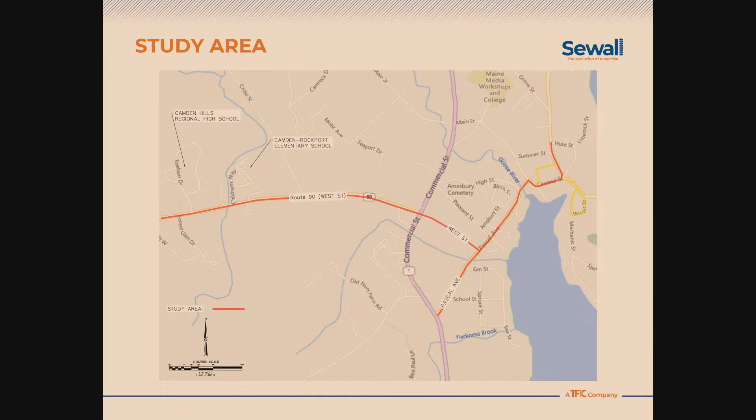I'll let Eamon talk about the website results. We've had two avenues for gathering your feedback so far: a meeting like this last May, followed right away by an online survey. We had 54 total responses to the online survey, which was open from May until earlier this year in January. So to recap, we've had one public meeting so far and an online survey open for the second half of last year.

The survey had just a few questions. The first asked about your needs, an open-ended question where you could write your own response. This takes all 54 responses and aggregates them — where there were very similar comments, they're combined, and where totally unique, they're left alone. So you see the most common response on the left and the least common to the right. We'll go into the top 5.

You can see there's a real set of front runners here. But if we sort them by theme, blue represents non-motorized travel, so comments about pedestrian and bike connectivity. Green had to do with vehicular travel, like lane widths and parking.

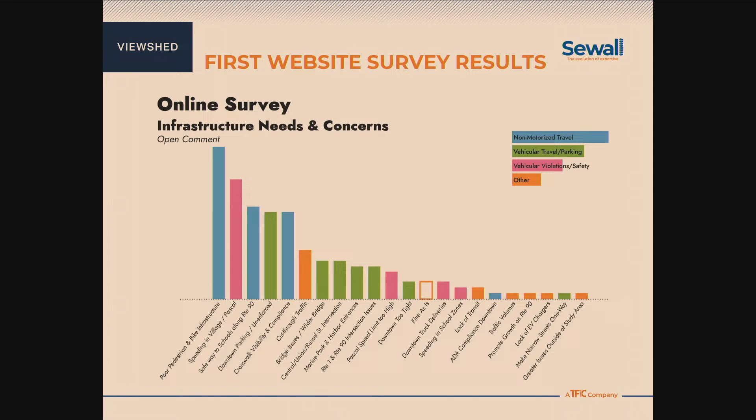Pink had to do with safety or concerns around safety, and orange were other comments. So if we go to the next one, these are the top 5.

Leading the pack was the concern that there are not enough bike lanes or safe places to walk. The second was issues around speeding, followed by no safe way to walk or bike to and from the school. Fourth place was inadequate crosswalks, followed by parking in the downtown area. So these are the top 5 concerns or needs expressed by folks responding to the online survey.

Just a little color here to see some of the specific comments. Related to not enough places to bike or walk, there was a comment that said, we really need a multi-use path, it's desperately needed to and from the school. Another comment noted that vehicles are often traveling too fast in the village core, that there need to be sidewalks along Route 90, that there are no sidewalks or crosswalks to get across Route 1, and not enough parking here at the library or at the Opera House.

Then the second half of the survey asked specific questions about particular areas in town. On the left, the village area. In the center, we have Pascal Ave. And on the right, we're showing the key map of West Street and Route 90 from the school all the way down to Pascal. At the bottom, you were given a set of choices: what's the most important issue in this area?

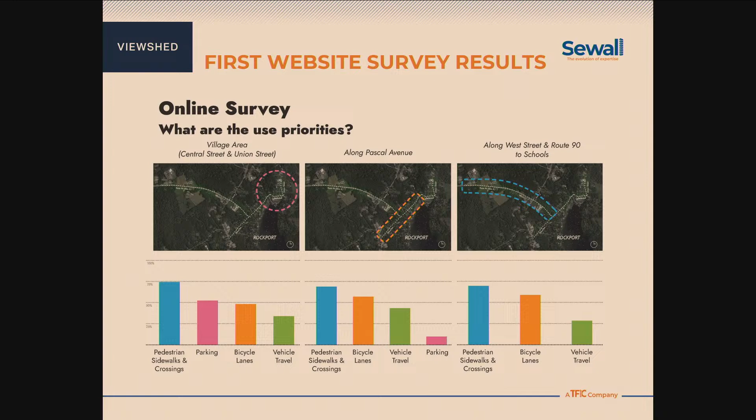All right, take it away, Diane. Back to me. So we did do a lot of traffic data collection and survey information, and I just wanted to touch briefly on those because it does impact how we got to our recommendations.

In terms of safety, there were no high crash locations within this study area, and there were also no locations approaching that high crash threshold. So we had no real accident crash location issues.

We did do capacity analysis of key intersections. Those key intersections where we did AM and PM counts under peak summer conditions included the signalized intersection of Route 1 and West Street and Route 90. We also looked at the unsignalized intersections of Route 1 and Pascal, Pascal and West, Pascal and Main, and Central, Russell, and Union.

What we found when we did capacity analysis for both 2023 existing conditions and 2045 projected conditions was that there was only one capacity constraint identified, and that was the intersection of Route 1 and Pascal, where during the PM peak hour, not the AM, movements exiting Pascal currently operate at level of service F with long delays. Under 2045 conditions, those delays will become really extensive.

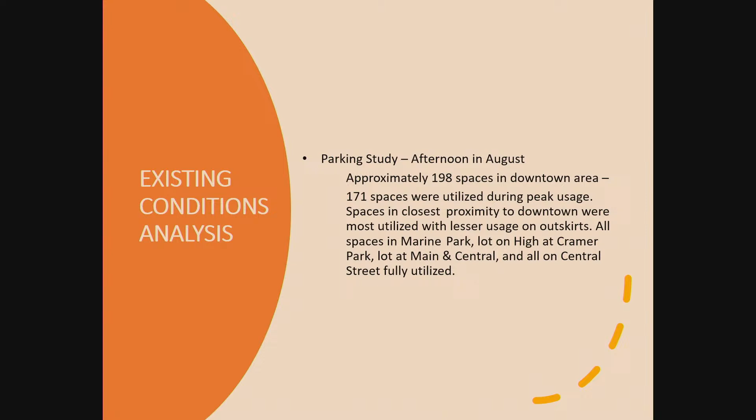All of the spaces in Marine Park were full. The lot on High Street at Cramer Park, the lot at Main and Central, and all of the spaces on Central Street were fully utilized at the time of this study. So that does show there is some more demand for parking. The spaces that were vacant were out on Lime Rock Street or back on Pascal. They weren't very close to downtown at all.

So based upon all of this, we've made some recommendations for what these roadway sections should look like in the future, with the idea of traffic calming on some of these facilities. The first one is Route 90, and again, this is to provide for students going to and from school. Most of Route 90 has a fairly wide right-of-way.

So what we're recommending is first that it be restriped with 11-foot lanes instead of 12-foot lanes, which might help slow travel speeds a little bit. Right now it's 12-foot travel lanes, which is wider than it needs to be. Then a 10-foot multi-use trail would be constructed along the side with an esplanade separating it from Route 90, providing for both bicycles and pedestrians to get to and from the schools.

Just so everyone's clear, the bottom panel represents the depiction of existing conditions. What we're suggesting would be on the top portion. That's consistent with all the forthcoming slides as well.

The next one is Route 90. When we get near Route 1, at this point we have less right-of-way, so we may need to get that path down to 8 feet, which is basically a bare minimum. We're going to try to get it to be 10 feet, but the right-of-way in that short stretch between Route 1 and the 4 homes that are there is a little bit narrower, so we may not be able to get a full 10 feet, and at that location it would be curbside. There isn't room for an esplanade. So that short stretch near Route 1, this trail would be curbside instead of separated by an esplanade.

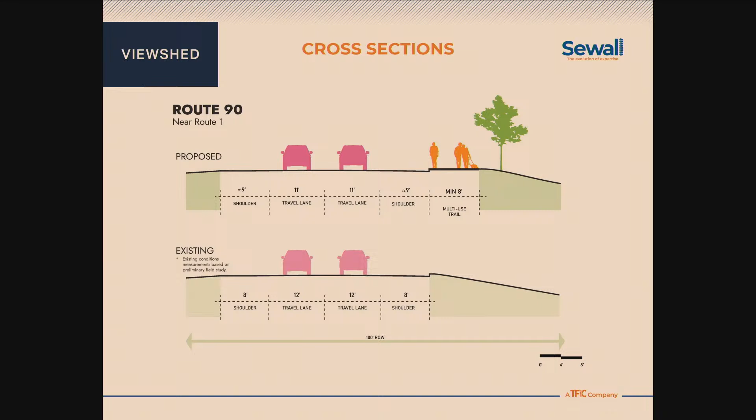Pascal Avenue, the section that goes from Route 1 to West Street, currently is already 30 feet wide—29 to 30 feet the entire length. There's a 5-foot existing sidewalk that generally is in pretty good condition. So this allows us to restripe that portion of Pascal to provide two narrower 10-foot travel lanes, which is fairly narrow, and that should slow your traffic speeds.

And then we would restripe the shoulders for bike lanes and provide bike lane markings so that the driver sees the bike lane markings and also will slow, recognizing that there may be bikes out there. So that's a very low-cost improvement that can be done with very little money, except for restriping and bike lane markings, to create that section along Pascal.

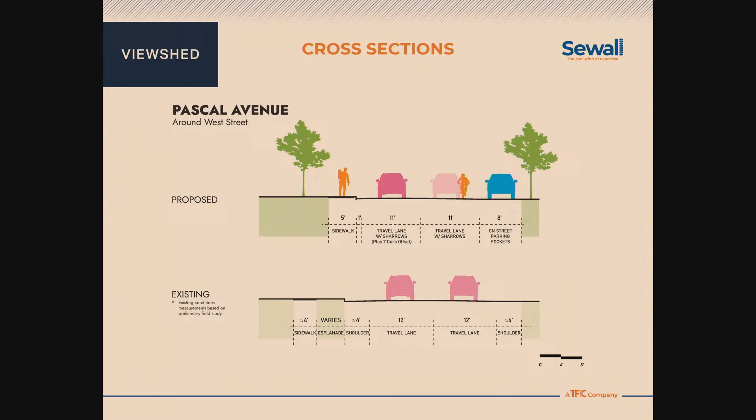When we get around West Street, there's quite a bit of on-street parking occurring, and you have a bit of a village area there, with some apartments that use on-street parking as well as a shop. So we would recommend here that we use the right-of-way to create some 8-foot parking pockets, some formal parking pockets. I would recommend the travel lane get a little bit wider to 11 feet because we'll have car doors—10 feet is quite narrow, and you don't want car doors opening into bicycles or whatever.

So this section would be marked with sharrows. Instead of bike lane markings here, you would have sharrows, which is a marking used in the travel lane to show that you should expect bicycles, and that bicycles have the full right to use that lane as much as you do. This is the same thing we're recommending downtown, because you don't have the width to add bike lanes, so this section would be marked with sharrows.

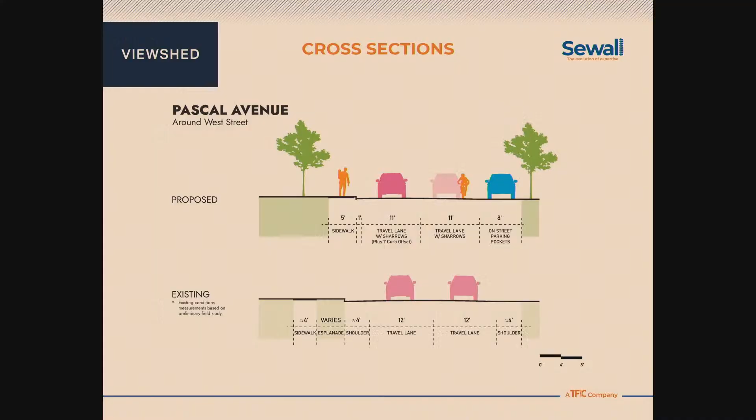When we get to the downtown section, from Bridge to Main Street, the committee felt strongly from the very start that there should be sidewalks on both sides, and we've been meeting with MDOT to convey that it's important that the new bridge have sidewalks on both sides. This section proposes pretty much what you have now, a pretty wide travel lane because of the curve, with the high elevated sidewalk on one side needing some offset, but we add a 5-foot sidewalk on the hotel side where there is none now to connect towards Marine Park.

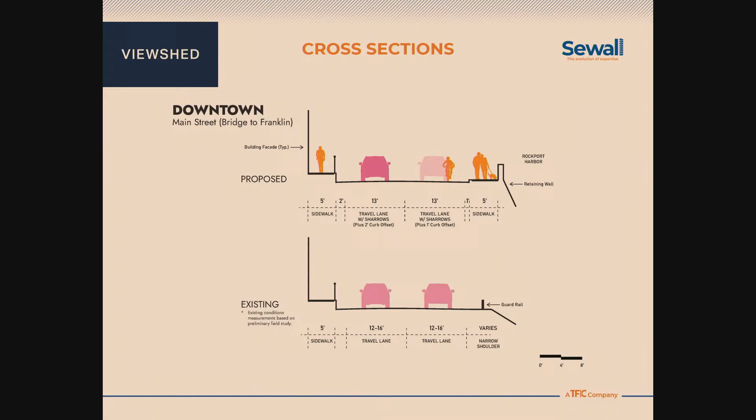That will require a retaining wall because there's a steep slope there. If we look at the downtown section, again, this is very constrained. Right now you have 8-foot parking lanes on both sides, 11-foot travel lanes, which we're recommending no change to.

But we are recommending a sidewalk on the opposite side from the hotel. This will also require a retaining wall because there's a steep slope, a couple of telephone poles, and a tight right-of-way there. Currently, people who park on that side have no place for their passengers to get out. There is no place to safely cross. They're dumped in the middle of the road instead of at a crosswalk. So we feel it's really important for a downtown to have sidewalks on both sides.

So that is proposed to be added there, and the rest stays pretty much the same. But there is a short section by the park where there's a 5-foot sidewalk, and this would be extended up towards the Opera House to that first driveway. We'll show all this on plans in a minute.

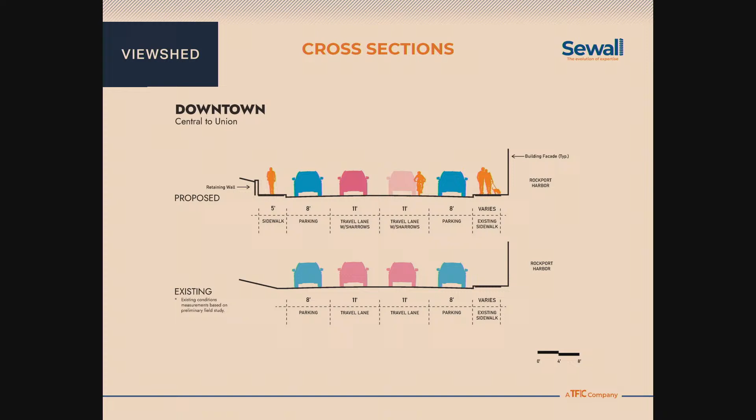The next one is West Street. Originally we had proposed 10-foot travel lanes to keep speeds slow on this residential street, along with bike lanes and the existing 4-foot sidewalk, but the committee felt that since we have a 10-foot multi-use trail up by the school, we should just provide a 10-foot multi-use trail along West Street as well, so that both bikes and pedestrians can use it. So here, again, we're proposing 10-foot narrow travel lanes to keep speeds low, with a 10-foot multi-use trail.

Then when we get to the RES site, it's pretty much the same section, except we're proposing some on-street parking there. We have more right-of-way at the RES site, and the multi-use trail might actually meander in and around the park a bit. It may not be exactly curbside, but there's some room there to add extra on-street parking for the RES site.

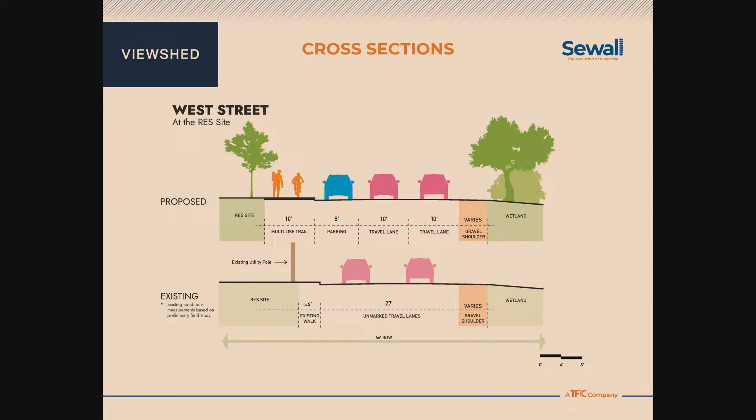That's it. So I'll continue on where Diane left off. This is a plan view representation, an aerial view that basically shows the perspective of the cross sections we were just reviewing.

So this is Route 90. It's cut off a little bit on the left, but it does anticipate the multi-use path extending to Keelson, the school drive. The green stripe represents the grass esplanade between the highway and the 10-foot multi-use path. It shows the slight narrowing of the striping on Route 90 from the current 12-foot lanes to 11-foot lanes, and the adjustment of the paint stripe shoulder width from 8 feet to 9 feet, with the attempt of narrowing lanes to try to slow traffic down.

On the right side of the slide, there are a couple alternate paths. One shows a completely alternate path to the elementary school. That's just something to consider to provide additional connectivity to that school.

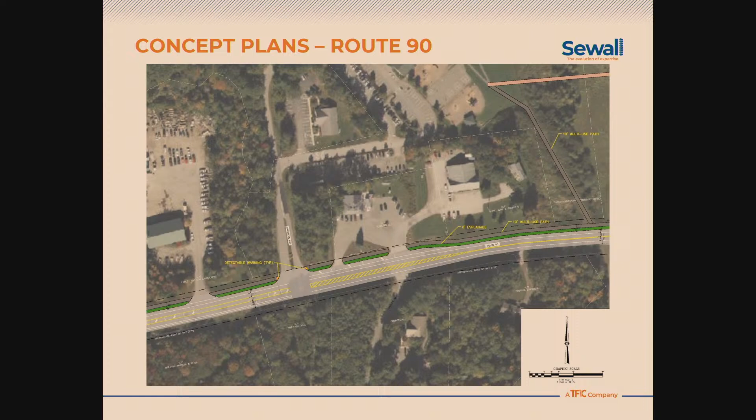Then continuation of the multi-use path, primarily with an esplanade. There is a bit of right-of-way constraint close to the intersection of Cross Street, where we'd likely have the multi-use path with just a curb section, no esplanade there, due to right-of-way constraints. That house is very close to the road with some fairly large trees right there.

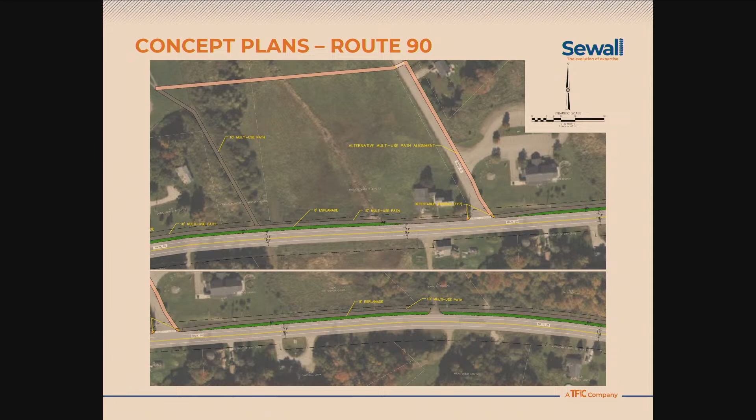So an alternate to that multi-use path alignment could be a path that goes down Cross Street and crosses over that existing field to the elementary school. Obviously, that's private property, so it would have to be an easement or a taking or something like that. But we just felt it was a good option to show, provided that the landowner was amenable to it.

This is the section near the intersection of Route 1, where the right-of-way becomes fairly constrained, particularly on the north side of Route 90. This section has a multi-use path labeled 8 to 10 feet. 8 feet would be the bare minimum you'd ever want for a multi-use path, preferably 10, but that section would be directly on a curb, so there'd be no esplanade as you approach that intersection.

At the intersection itself, there's an existing crosswalk that crosses Route 1 from the res site. What we'd propose is another crosswalk heading north to the other side of Route 90 to provide connectivity to that multi-use path, with an ADA accessible ramp and detectable warnings on that side of the intersection.

Another thing we talked about at that intersection is providing exclusive pedestrian phasing, because Route 1 is very difficult to cross. We'd propose to DOT that this become an exclusive pedestrian phase, so when a pedestrian pushes the button to cross Route 1, all traffic stops rather than moving concurrently with pedestrians on the same side. That's what we'd recommend for that intersection.

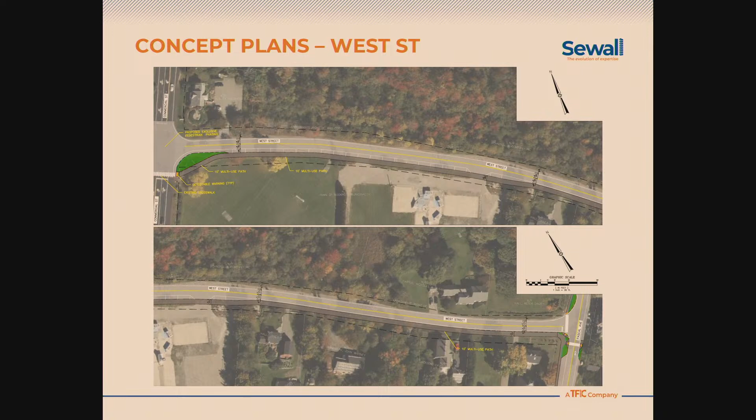The top pane depicts the intersection of Route 1 and Pascal, effectively the same footprint you've already got - it's effectively a restriping project. So you'd have 10-foot lanes, narrowing the travel lanes. 10 feet is fairly narrow; in fact, DOT wouldn't let you go any narrower than that. That would be the bare minimum, which should calm traffic down to a certain extent.

It's a little hard to see, but if you look at the little white symbols in the shoulder, that would be the formal bikeway, the bike travel lane, about 4.5 to 5 feet in width. Again, within the limits of existing pavement, so it'll vary a bit, but you have the pavement width to accommodate this cross section all the way up to West Street, which is great.

There's a crosswalk proposed at School Street. There's not one there now, and it's approximately 400 feet from the one at Route 1, so we'd propose a crosswalk there. All of these crosswalks on Pascal, we're recommending be equipped with rectangular rapid flash beacons, so pedestrians push the button and get that visibility.

Can you go back really quick? Where's that? You're getting a sneak preview of the rest of the slides.

Those pedestrian big flashing signs let pedestrians push a button to make it really clear that somebody's crossing that crosswalk. They really increase visibility and reduce accidents at crosswalks. They're solar powered and pretty inexpensive - about $15,000 for installation, but DOT's had a program lately where they get them at bulk cost and sell them to towns for their cost, which reduces it even further.

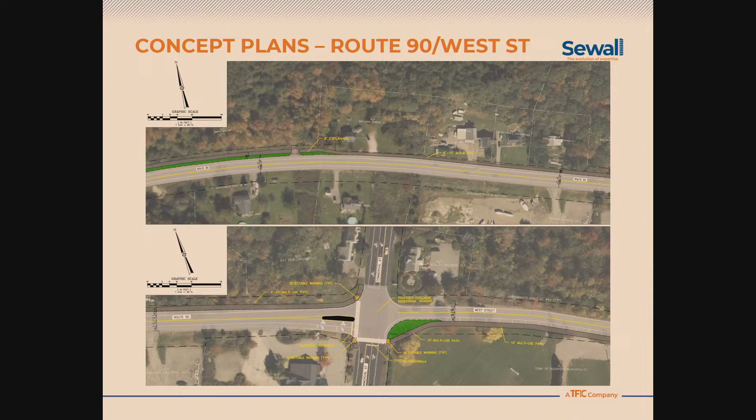We're not proposing any changes to the lanes, although I have looked at that. So the existing lane use is southbound on Route 1 — so if I'm going southbound and going to turn right onto Route 90, there's a median strip, you can see that black tongue there. Most trucks go over that median strip.

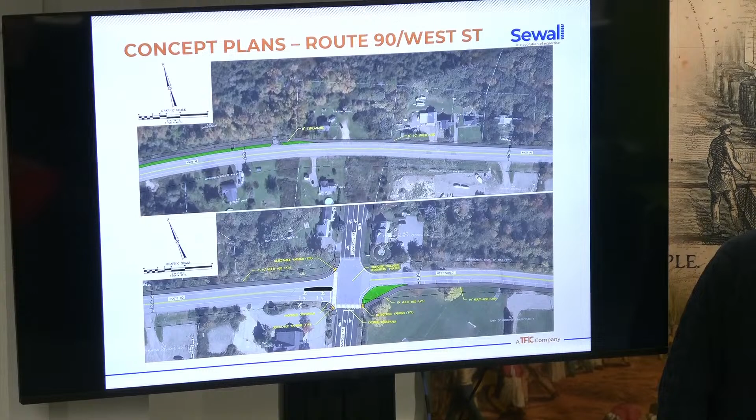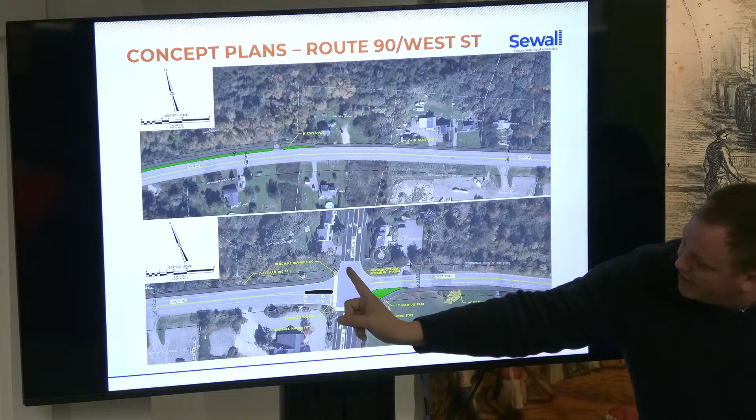The question was whether or not you were going to have a sidewalk on the north side of Route 90. There'd be a wide multi-use path, a continuation of that overflow trail, that extra lane that comes down the hill on Route 1. So if you're coming down the hill, there's the left turn lane that brings you here, and the straight and right turn lane — and you're saying people go over the white line into that third space? Oh, absolutely, most people do. This curb line is on the outside of that, and the multi-use trail — all three of those southbound lanes are open.

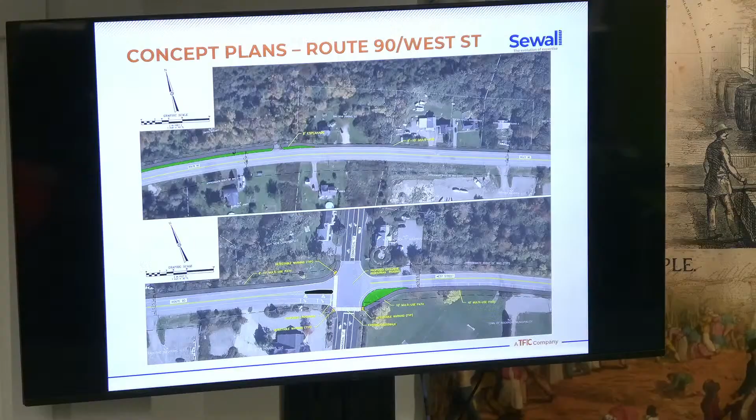So you're proposing taking a piece of land to the right of what's existing? It's within the right-of-way. If you look at the dash line, the right-of-way is fairly wide, so it's not taking any property — it's within the existing Route 90 and Route 1 right-of-way.

Not to say there may not be a need for construction easement or grading easement. These are conceptual plans. What I was concerned about was pedestrians, really, with the big trucks turning there. I was just concerned about people, especially, I mean, that's huge.

Well, that's where we're recommending that anybody on that crosswalk, when that's occurring, no vehicles are moving, so that's safe, so they get up on that multi-use curbed, raised, multi-use trail. So it's not at grade level, it is curbed and raised. Oh okay, that helps understand.

We've also looked at that intersection, and currently it is striped southbound as a left and a through-right. It would function better—there are very few left turns now with the school gone there. It would function better if it was a through-left and a right turn lane. But it would require a realignment of the whole intersection, because right now you have a northbound left opposite a southbound left. So it would have to be realigned to change those lane uses, but the intersection would function much better. That's something we're looking at as well.

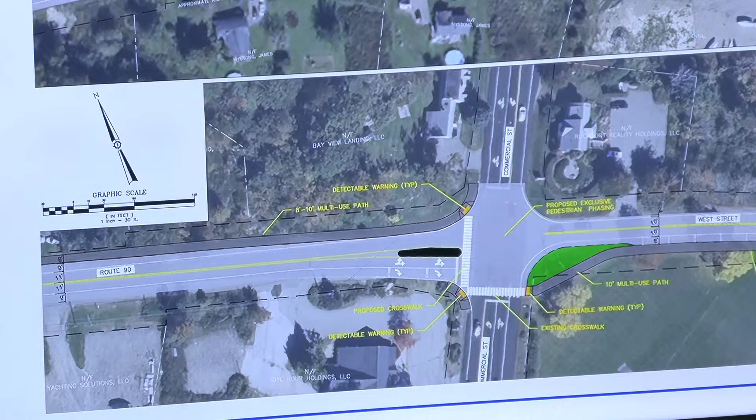Thank you, I just have one more question. I want to understand a little bit more about the transition between Mechanic Street and Russell, specifically because I walk that road quite a bit. When we say there's a sidewalk there, right now you can walk it, but in the summertime almost all the vegetation covers the sidewalk until you get to that point where that telephone pole is and you have to turn left.

I don't know exactly where you're talking about there, but there's a huge ledge there along the road on the left. It's very narrow, and it's a completely blind corner when you're walking. There's no way to cross over to the other side to get onto the ocean side of that section, which is where the sidewalk is, once you get to Mechanic Street.

So the thing is, if you're proposing putting cars on the left side there for parking, I can't imagine how that would feel, like how that would work walking with my dog and things like that. I just don't feel like there's enough space getting around that corner. Do you know what I'm talking about, where that little curve is?

Well, there wouldn't be parking right at the corner. There would just be sidewalk, and it would become one-way instead of two-way, so you'd actually probably have more room. It would be one-way from Russell to Winter.

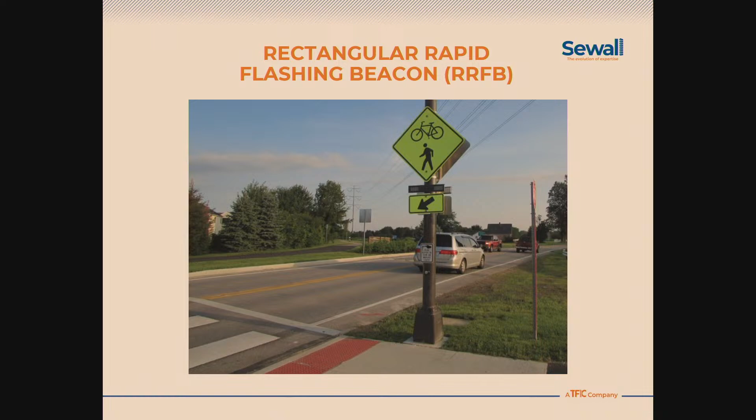Another question: are the proposed esplanades on Pascal going to be redone, or are you just showing this for sake of the plan? The esplanades we're not redoing. It's pretty much to show where the existing is and where the green space is, so yeah, for plan clarity.

The last question: there's very few left turns except for the people that live down in Rockport Village. I guess it's a statement. Probably southbound on Route 1, I'd assume, when we talked about that. There are very few left turns, just a handful.

That's all the questions online so far. So there's another question over here.

I have a question about these RRFBs. I was just wondering, do they click and beep and make noises for the people who live there? No, these ones don't make noises, they just flash when they're activated, and not all the time. Unless you wanted that, I don't know if that's what. For traffic signals it is audible, but I don't believe it is for RRFBs.

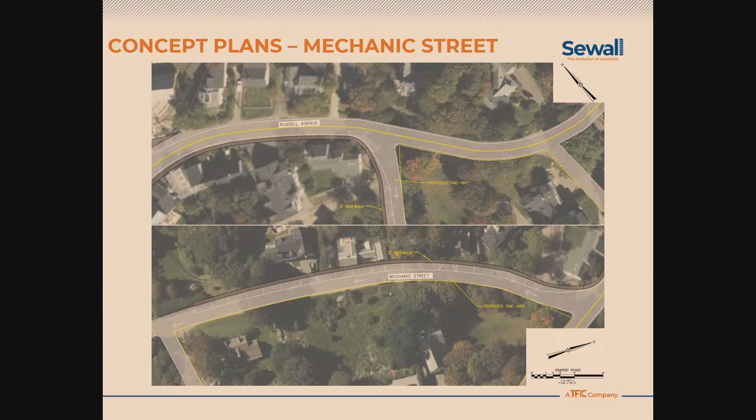Like we said, we were proposing additional spaces on Mechanic Street, maybe a dozen. We're looking for parking pockets in the park, probably at least another dozen spaces along the street. And then, do we have someplace else? Formalizing the parking pockets along Pascal, that probably wouldn't add any, but it would be a more formal parking arrangement. You could tear down the hotel.

So going into 2045, is this enough parking for the town, or do we need to reconsider our parking situation and add more? We did not project parking into 2045, that will depend a lot upon what your land use does. We just projected traffic volumes, which is what DOT requires, a 20-year out study year. So the traffic analysis was 2045, but for parking we're just looking at current conditions, because we don't have a crystal ball as to what's going to happen down there.

So we have an opinion: I think you could certainly use some more parking. It would make it easier for people to visit and shop, and that's what we're trying to do in close proximity. You do have the park, Kramer Park's a great location to add it. My understanding is Marine Park was built with federal dollars that limit what you can do there, so you really can't add parking at that location. You have all the parking you can have in the harbor area. So you don't have a lot of other opportunities, which is why we thought Mechanic Street was an easy one, pretty close by, especially if you've got an Opera House event going on. It would be close proximity parking.

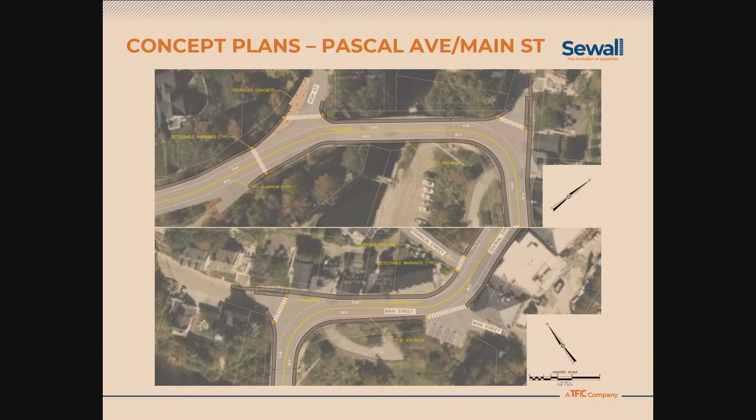One more thing that could become an issue is the big parking lot behind the hotel, which has basically a one way in, one way out. I don't even know what that road would be. It's Main Street. I worry that people are going to go down there, check for parking, find nothing, and come back out. It's going to become a busy little corner there.

The parking lot's not really open yet, so it's probably not presenting any issues now, but I could see it becoming a problem in the future. That parking lot is private, it's just available for the hotel. Oh really, it's all owned by the hotel?

The hotel doesn't have a lot of rooms, so it's not projected to have a lot of trips in peak hours. Although it will probably be more trips than using that lot now, it shouldn't be a very heavy flow. I didn't realize it was private, so I guess that's probably not going to be a big issue.

Good evening. Thank you for all your hard work and the committee's hard work, it's very much appreciated for the town. Microphone closer, please. This is the first time I've ever spoken at a meeting in the entire time I've lived here, for 20 years.

But I just think it's imperative that you review again specifically how many crosswalks you have on Central and how many you have on Main, because the running back and forth is quite severe. And I just want to understand why an additional sidewalk is being added on the other side of the bridge. Is that a DOT requirement, or is that just a request?

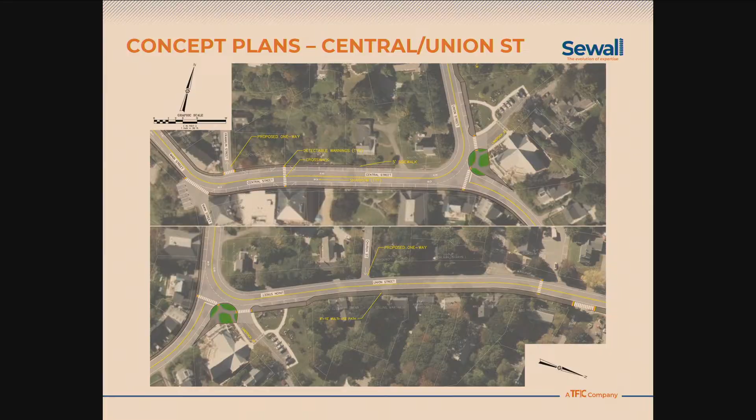They won't necessarily. Unfortunately, that does not happen now. Only possibly residents will abide by that, but beyond that, everyone just runs across the street at any point. Well, because there's no sidewalk to collect them, they have to run across the street now. If they park on the opposite side, they have no choice but to cross at that location. So if we give them a sidewalk to collect them, they should be able to go back to the crosswalk to cross. I don't think I'm making myself clear, so I'll pass on the microphone.